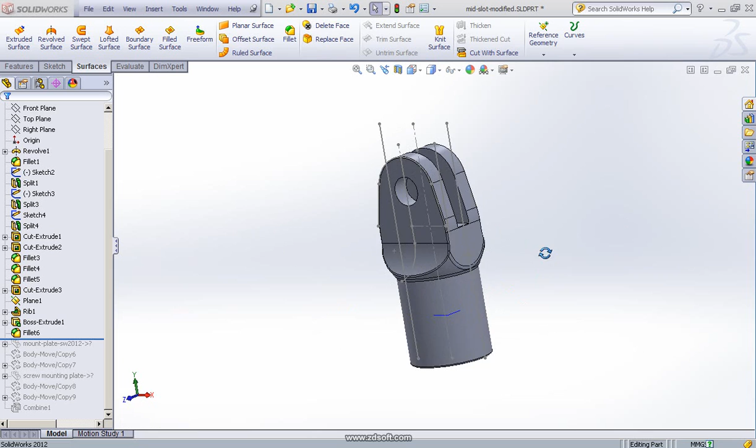From the previous video, I've shown you we do the part modeling until we get this geometry here.

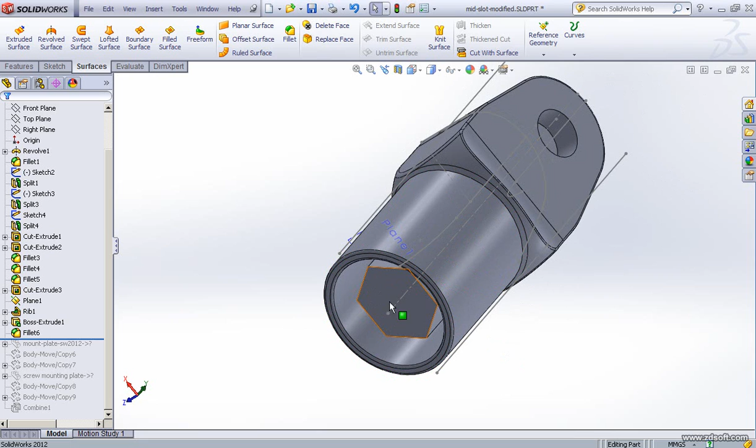The next thing we will do is, since at the end of this ball here, this hexagon here, what we shall do is put a screw so that the screw will be mounted here, then we can do subtraction to form the inner thread. But actually the screw is not directly connected to this hexagon face here.

So for this case, what we should do is the screw will be fitted and connected to just another component here, which I will put in later on. We have another component here that will be fitted into this hole here.

The component name is the mount plate. The mount plate will be put here and fitted into the right position. Then only we attach the screw to the mount plate at the right position, so we know the exact position of the screw in this sub-assembly here.

So when we know the screw is in the right position, only then can we subtract the screw from the mid slot component here. So I'll show you in this example.

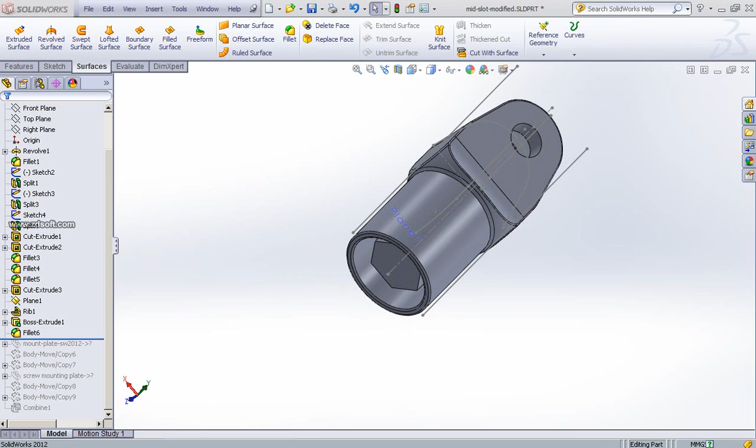This is where we stop from the previous video. So the next thing to do is, let me go back, the next thing is to insert a part.

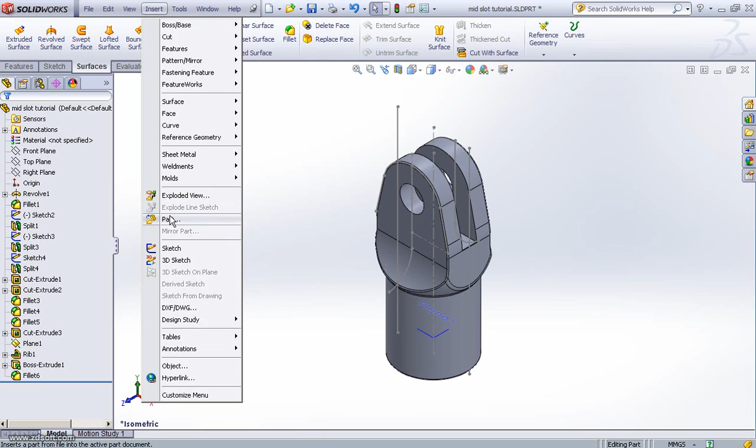In this case it will be the mount plate. Now we have our mount plate here. If I zoom out a little bit, we have our part, so we just put it somewhere around here.

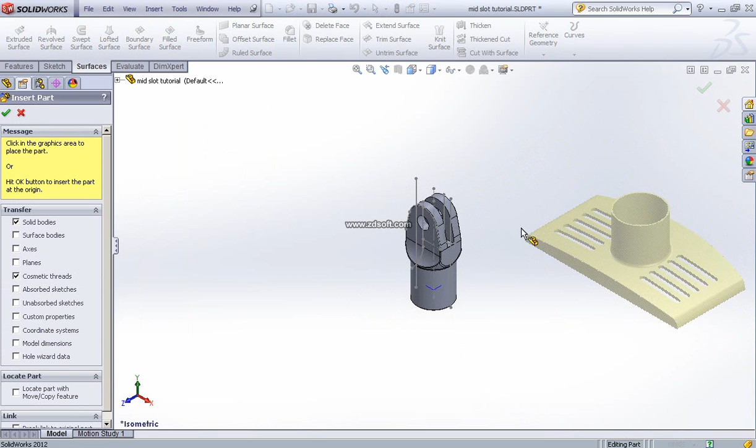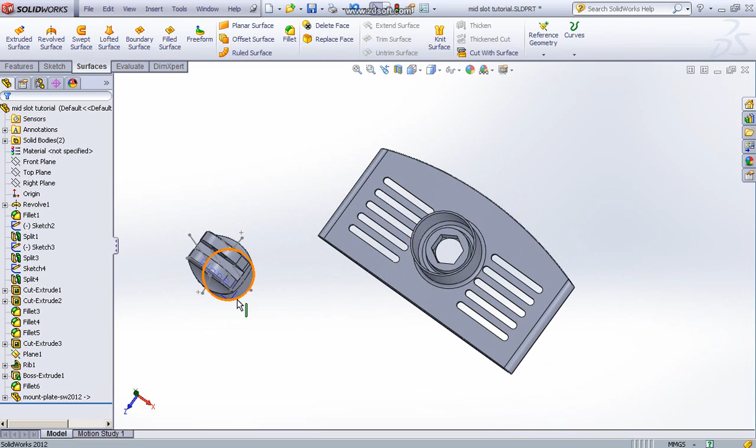Then if you look at the orientation of this mount plate, look at the hexagon of this mount plate, this hexagon hole here, this hexagon hole will be fitted to this.

If you look at the bottom part, let me try to zoom it a little bit. Okay, alright, we have the right view now. If you look at the hexagon of the mount plate, it's not in the same orientation as the hexagon of the mid slot. So the mount plate should be rotated.

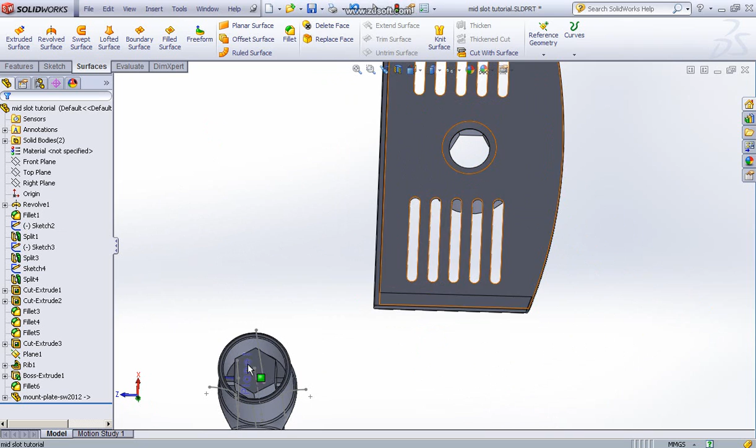If you look, the mount plate hexagon orientation is in this orientation, but the mid slot hexagon is in this orientation. So what we shall do is rotate this mount plate 90 degrees on a certain axis.

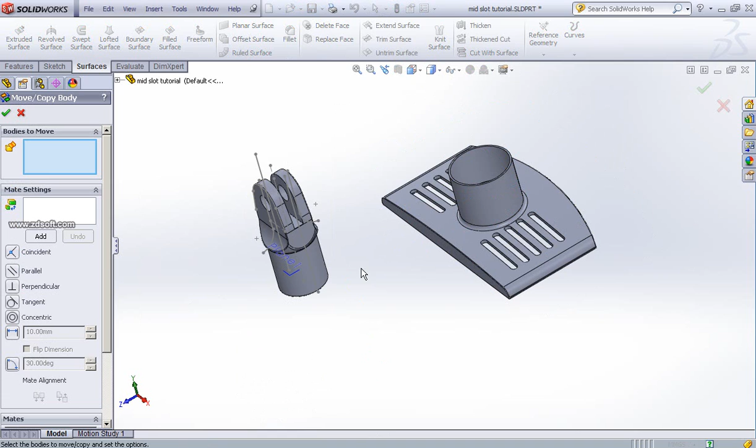What I will do is use Insert Features. We have a command called Move/Copy here. This Move/Copy command lets us either move or translate the object we selected.

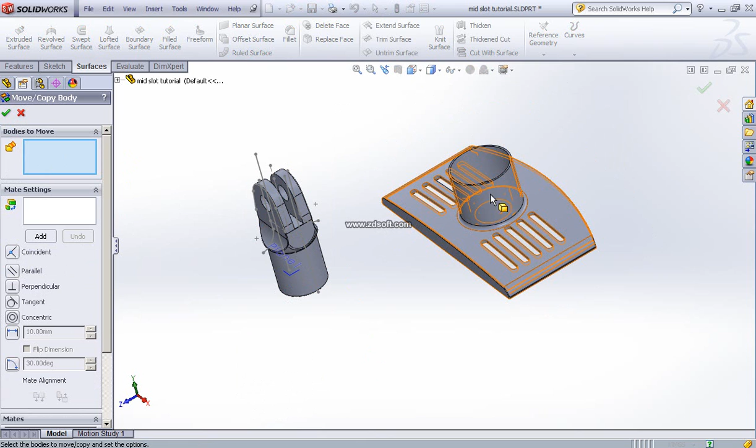So in this area, in this 'bodies to move' section, I will select this mount plate to be moved or rotated. So one is selected. At the bottom here we have Translate/Rotate, so I click on Translate/Rotate.

So I will not do a translation, what I will do is a rotate. So I open up the rotate setting.

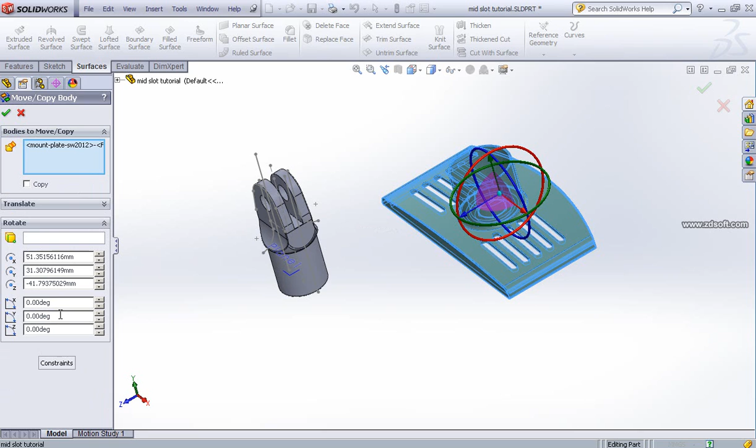Let's go for rotate about, let's try, I'm not sure about the axis, let's try about 90 degrees on the Y-axis. Let's see what happens when we press enter. Yes, so it rotates on the Y-axis, the mount plate will be rotated 90 degrees. Then we click OK.

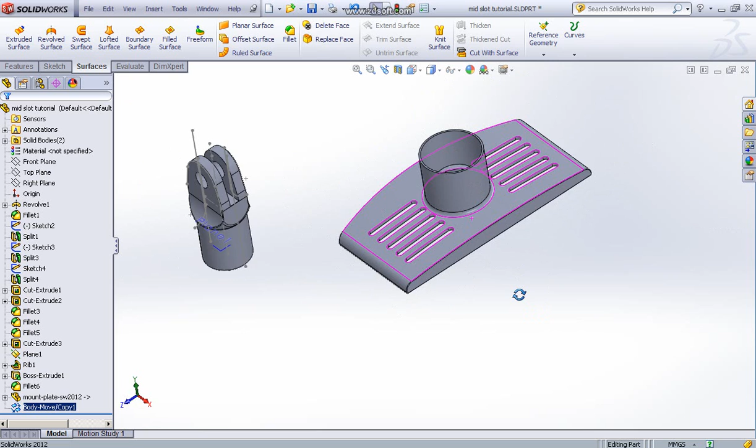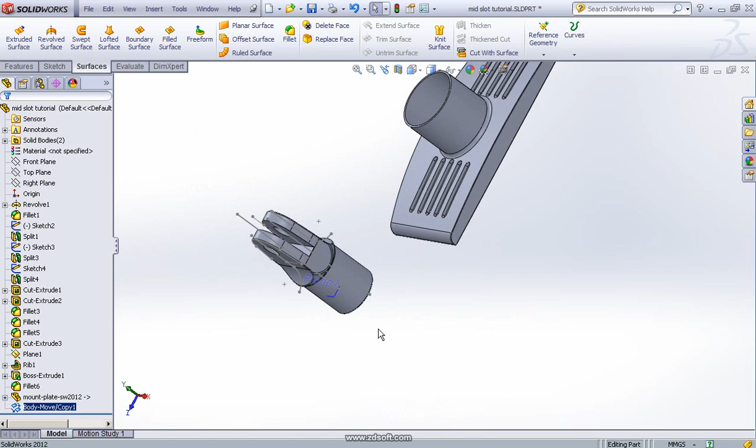So the mount plate is now rotated 90 degrees. The idea is so that the hexagon holes of the mount plate will be nicely fitted to the hexagon of this middle slot, since they are now in the same orientation. So the next thing to do is, let me zoom in to isometric view.

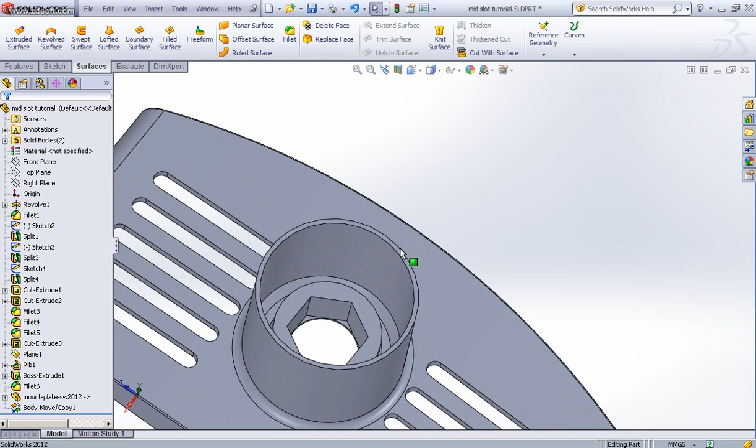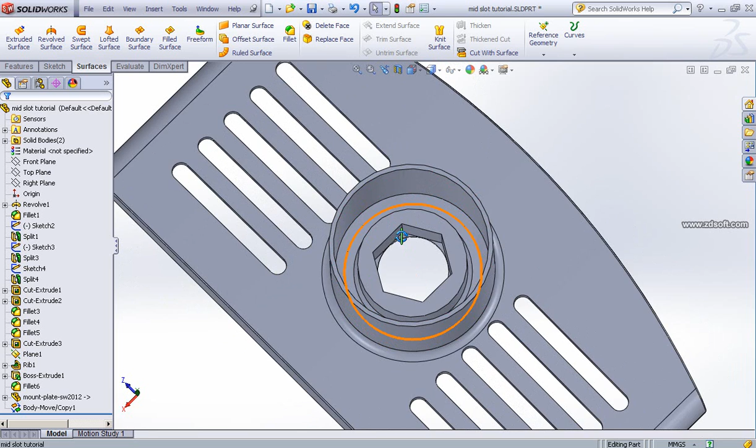Okay, the next thing to do is we set another constraint where we will attach this mount plate. If you zoom closer into this mount plate here, inner of this mount plate we have a flat surface, since we have a hollow cylinder here. So this is chamfer, I've done this component with a little bit of chamfer at the corner of the edges, but at the middle we have a flat surface.

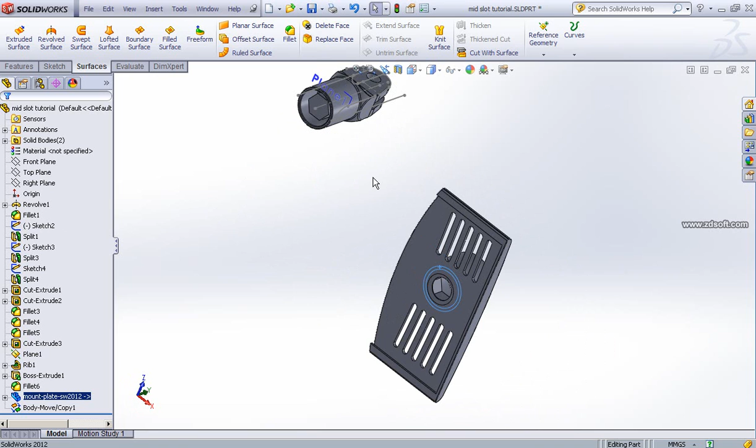This flat surface will be coincident with, if I zoom out, the flat surface at the bottom of this mid slot. We have a flat surface here, we have a flat surface there, right? So that's the thing we should do.

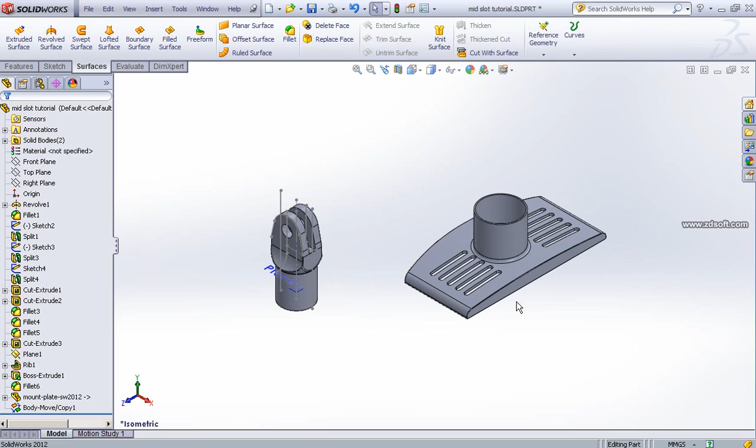Okay, I zoom again into isometric view. Then what I should do is go to insert features again, then use move body copy. So we need body to move, which is this mount plate. Alright, so we have this mount plate. So under mate setting...

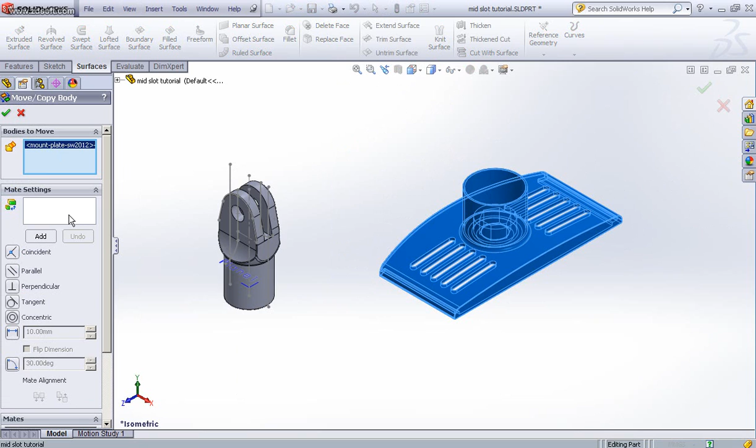Sorry, my laptop is running slow.

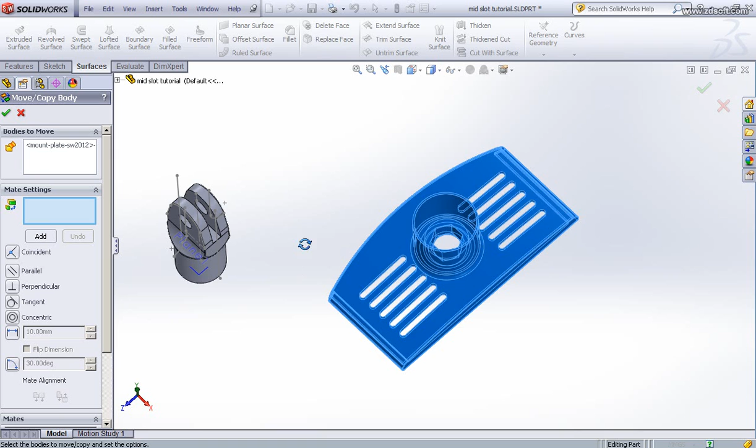Okay, under mate setting, if I zoom in, the first thing to do is set the first constraint. Our first step of mate setting: we select this surface of the cylinder, and the surface of this cylinder of this mid slot should be automatically put into concentric. SolidWorks will put it into concentric. So we set our first constraint there, it will be concentric.

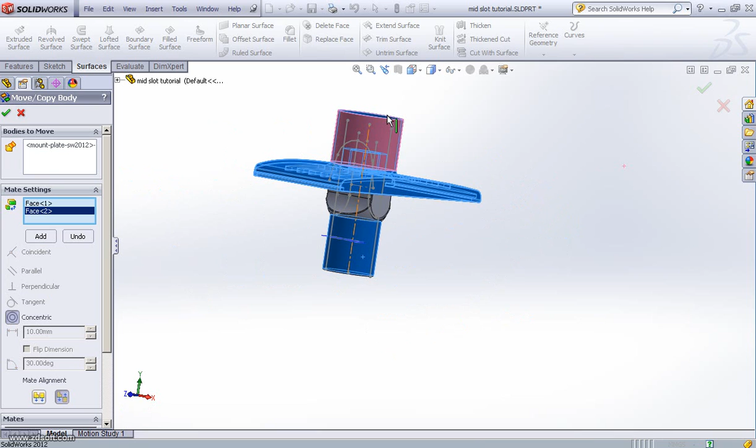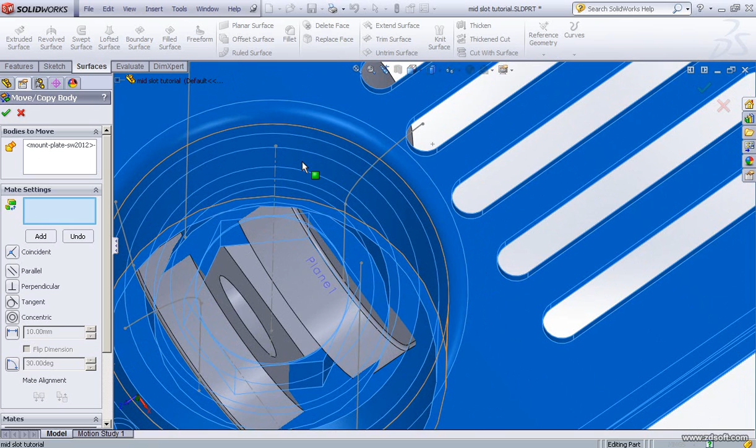Then we click add to lock it. The next thing to do is we carefully select the inner surface of this... we carefully select the surface here, not the surface, let me check again.

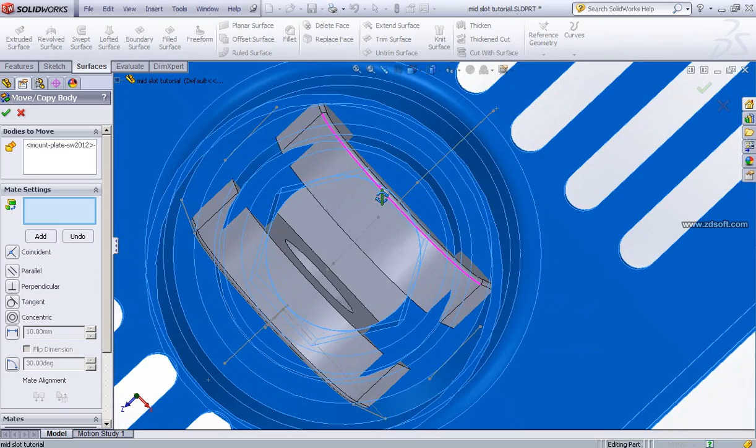Zoom it a little bit. Sorry, my laptop is running very slow, so I need to get to the right surface. So the surface will be, since this one is quite... let me check.

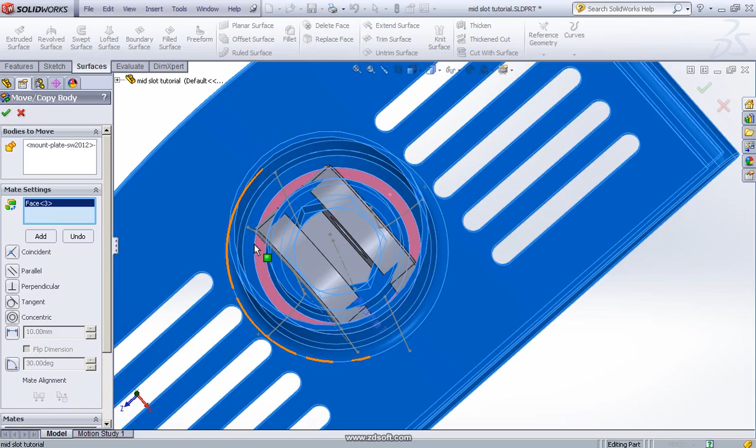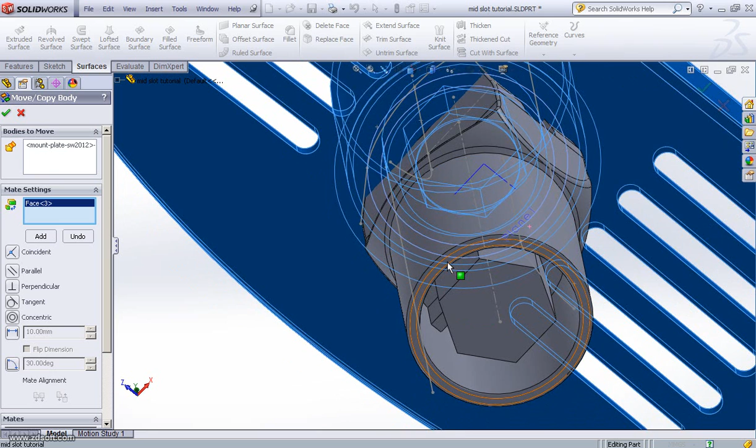Okay, we carefully select this surface. Yes, this inner surface, and this inner surface of the mount plate should be, let me zoom in on the bottom part. That inner surface should be coincident with this surface of this mid slot. Okay, then we click add, then we click OK.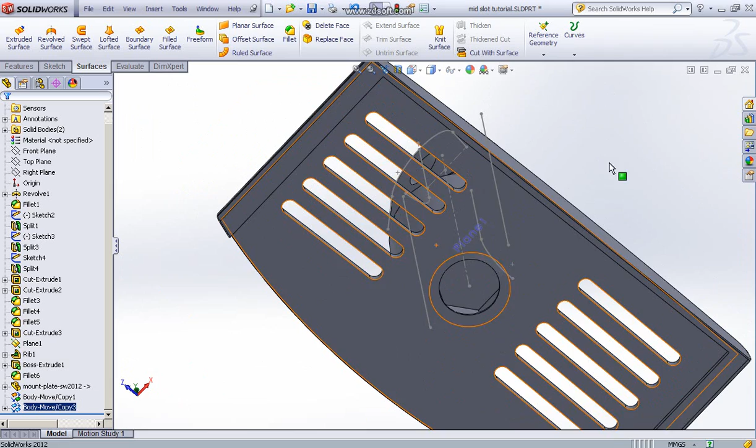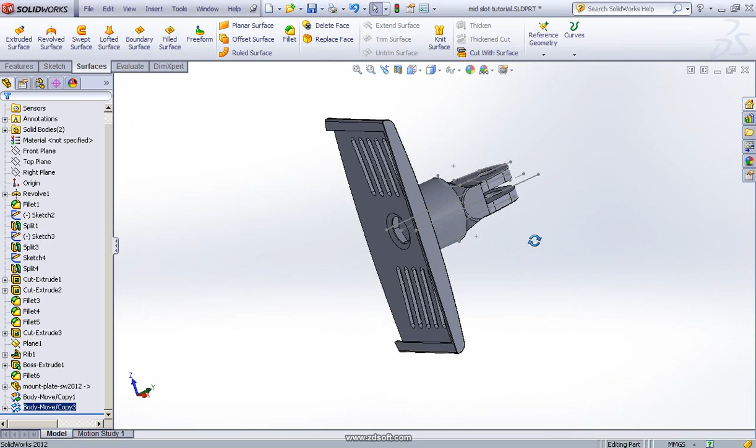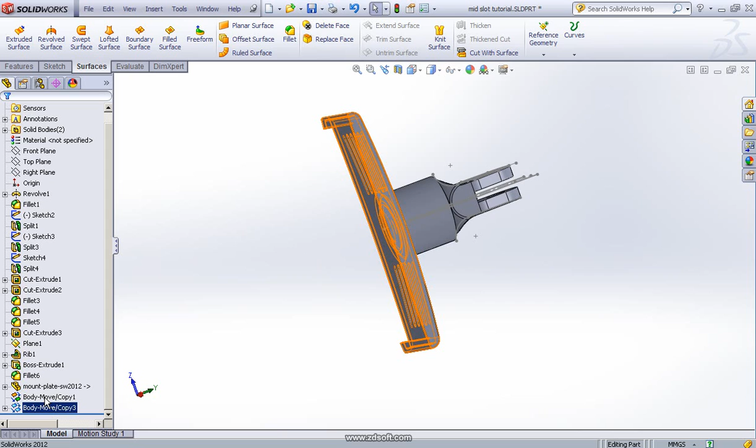Okay, right now our two components are in the right position. So we have our mount plate already moved and attached to the right position to the mid slot, by using the insert features move body command. If you check again, what I've done is two steps of move: first I do some rotation on the mount plate, then I do another move body copy command to put it into the right position to the mid slot. So now we have our mount plate in position.

So in this video we are not going to make an assembly of the components. The reason is that we want to put our screw here to the right position, so the screw can subtract to form an inner thread in the mid slot component here. So in order to mount the screw, we need to use our middle component here, which is the mount plate, so that we can put the screw into the right position. The next step is to insert the screw, which I've already made for this component, then I put it using the same approach, attaching it to the right position.

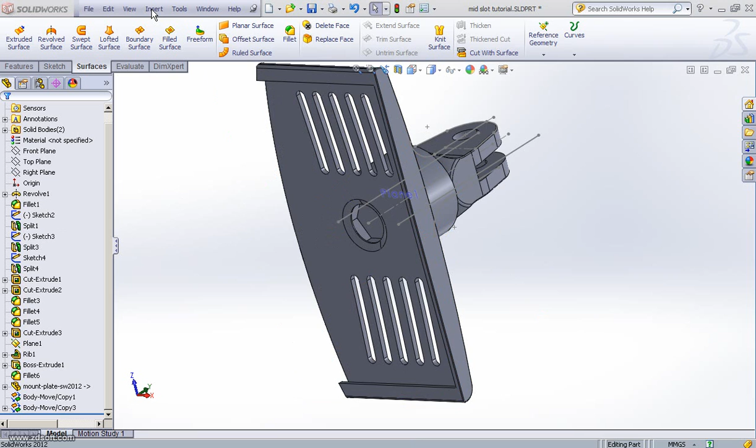Alright, the next thing to do is we insert a screw component. We insert part. Let's find the screw, hold on... the right file is this one, screw mounting plate, screw for mounting plate.

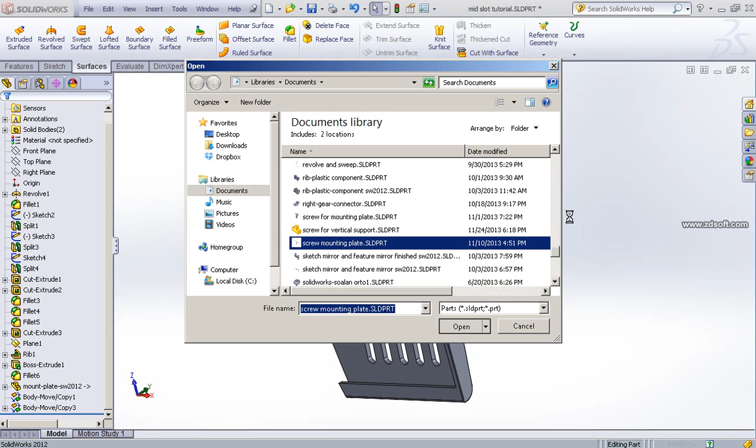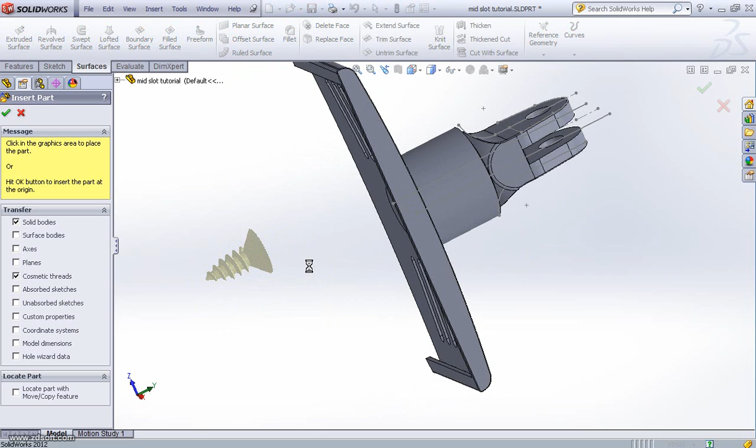So this is a screw component which I have made previously, which is a screw for this mounting plate. So I put it somewhere around here. So we have our component there, this is our screw. The next thing is we need to rotate this screw, because this screw's direction is this direction, so we need to rotate it 180 degrees.

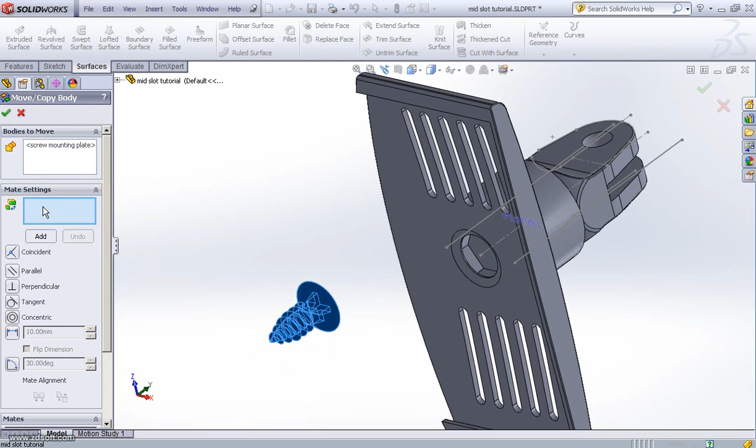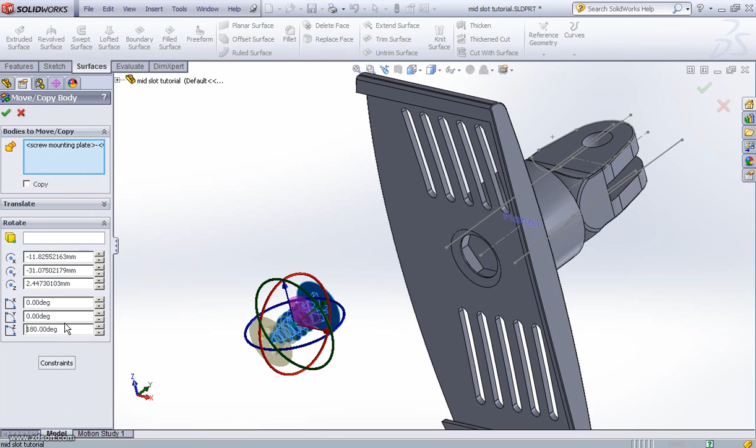So then what we will do is go to features, move copy, select our screw object. Then initially sometimes the setting here will be in mate setting like this, so make sure that you scroll down and it is set for translate/rotate. Make sure you open the rotate setting here. It should be in the Z axis, 180 degrees, and you press enter, so your screw is in the right orientation, pointing to that direction. Then we click OK.

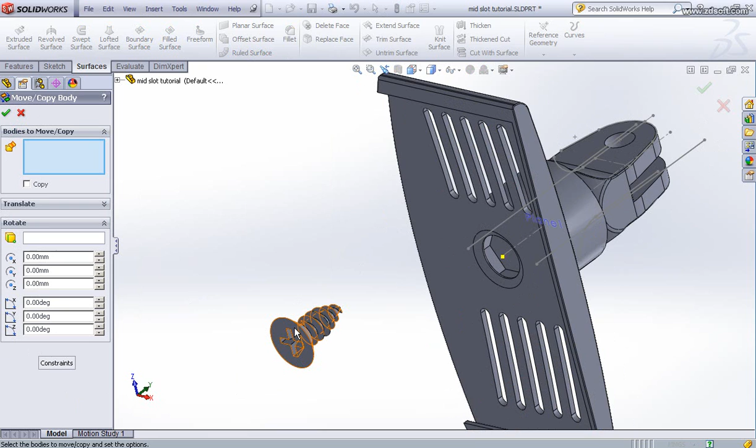Okay, then what we will do is use another feature, Move/Copy. So we need to make sure that our body to copy is our screw. To move the screw, make sure that we set it into constraint mode.

So under constraint, what we should do first is select... Okay, after we have set our screw into the right position, what we'll do is go to Insert.

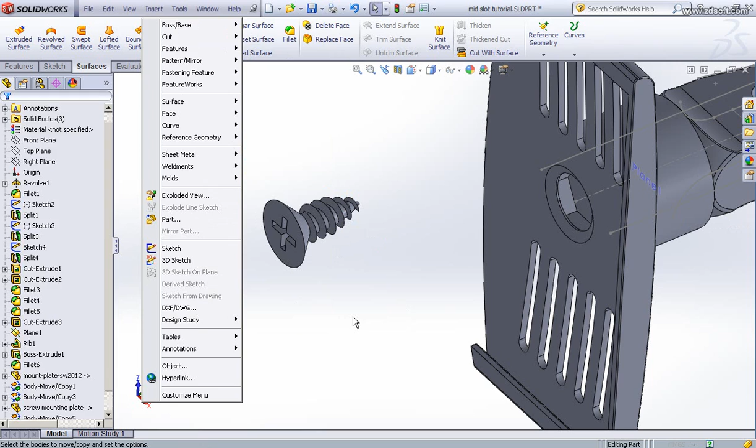We make another Move/Copy command, Features, Move/Copy command. To put the screw into the right position, we set it under constraint here, making sure our setting is constraint mode. The body to move must be our screw object.

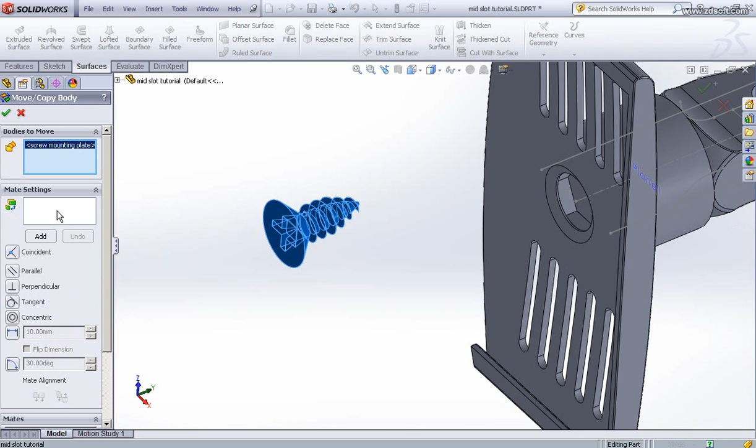Under the mate setting, first we have two steps here. We select the conic surface of this screw, this surface of the screw, and the surface of the cylinder.

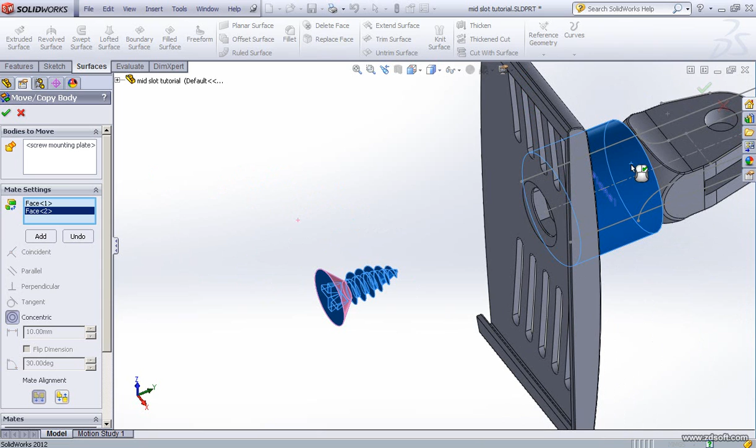Automatically it was set to be concentric. If we zoom at the right view, you will see that the screw and the mount plate cylinder are in the concentric position. Then we click Add to lock it.

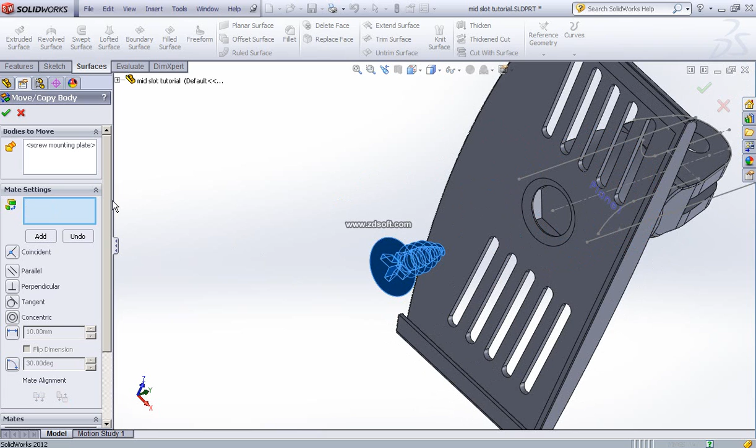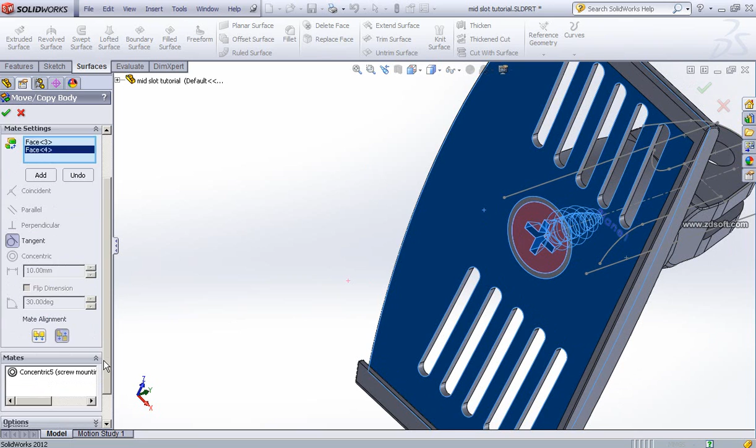The next step under mate setting: we select the face of the screw and the face at the bottom of this mount plate, since that face is flat. We select the face of the screw and the face of the bottom surface of this mount plate. Then it will set automatically into the right position. Then we click Add, then we click OK.

Then our screw is put into the right position there. So our screw is fitted here. Only then can we do the subtraction.

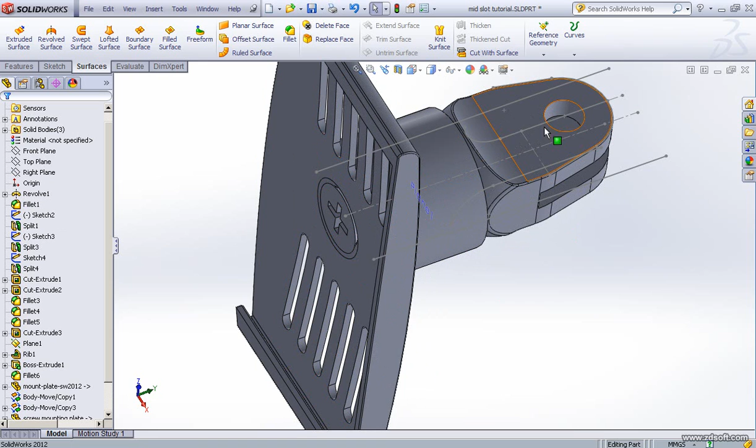Since our screw is in the right position, we can use the Combine command. We use Subtract mode to subtract this mid slot, to cut out this screw from this mid slot component.

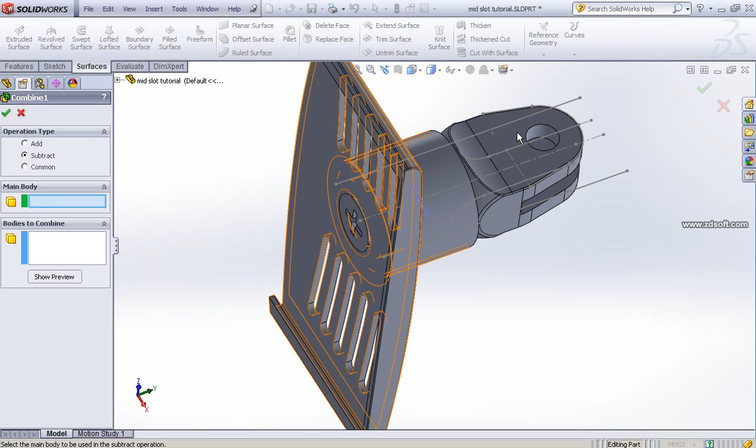What we will do is go to Insert, then Features, but now we don't use Move/Copy, we use Combine. Make sure the setting is Subtract. Our main body is our mid slot. Make sure our main body is the mid slot, which is selected.

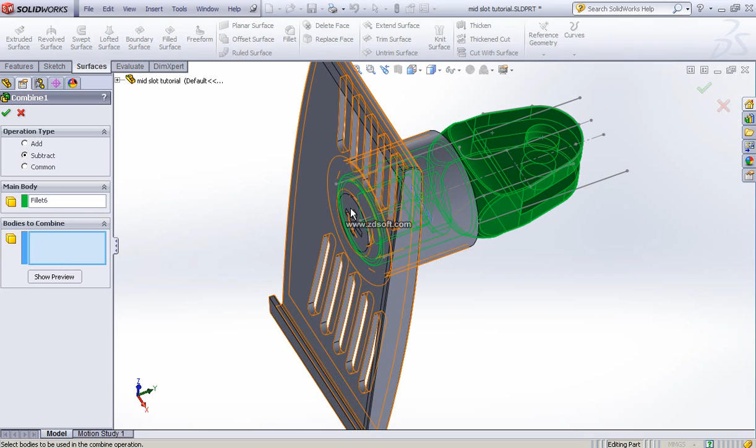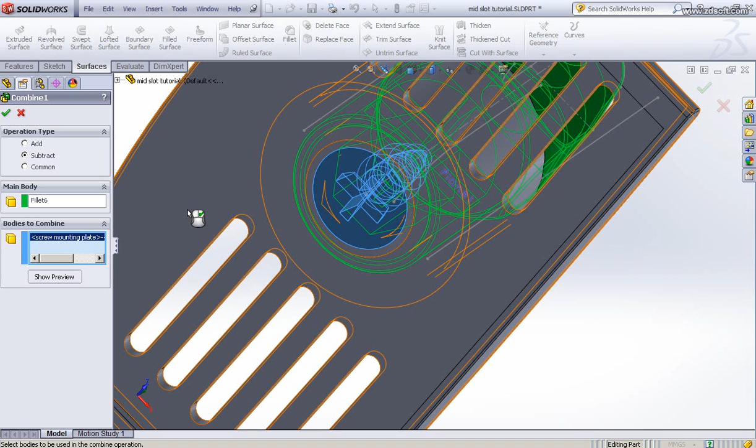The body still to combine is the screw object. Zoom in a little bit closer and carefully select the screw object. Then we click OK.

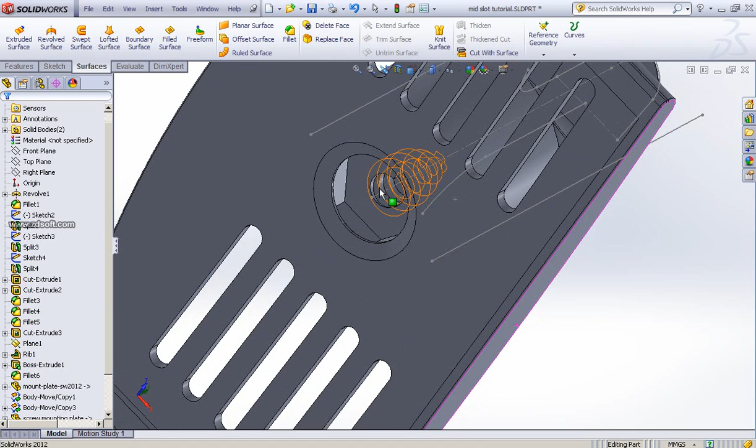As you can see, the mid slot component has already been cut out to form the inner thread there. So the screw has been subtracted from the mid slot in this assembly.

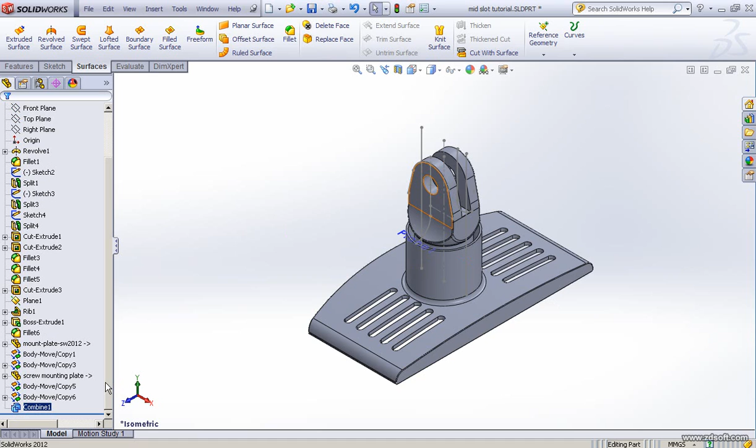Since the mount plate is not meant to be in this file, what we need in this file is only the mid slot. Let me go to isometric view. So what we can do is select this mount plate, and we have a pop-up here, so we click Hide.

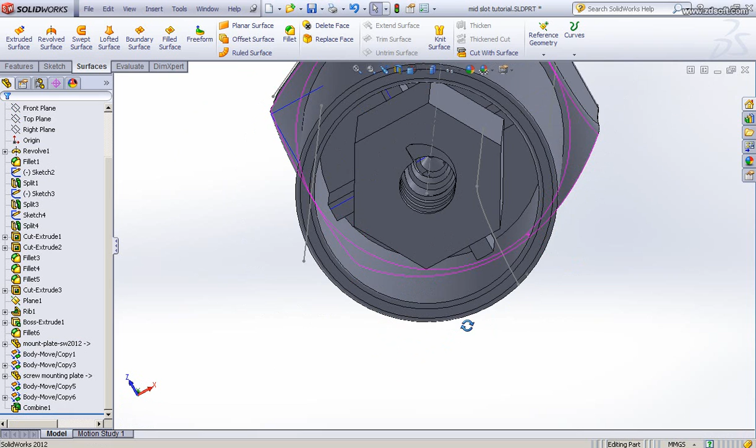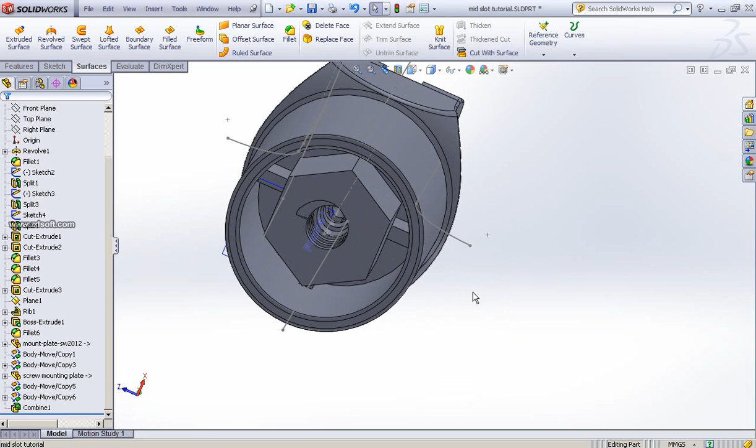I think that's all for this component. So we have done it, make sure that we save our component for our mid slot component.

Inshallah, I hope you guys can do it and can use this video as a guidance for you to do part modeling in your SolidWorks project.